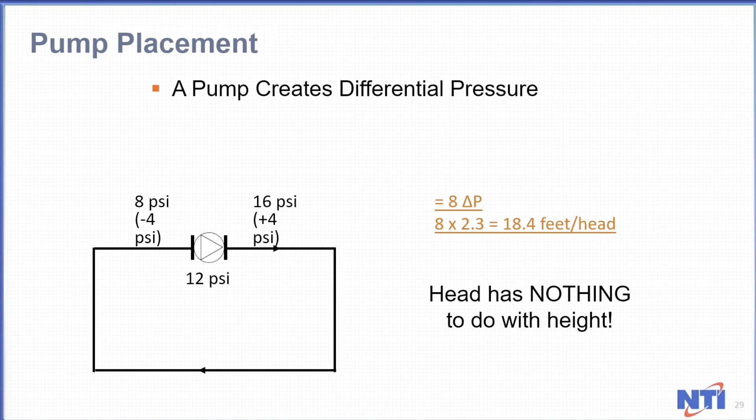But we really need to have an expansion tank somewhere in here to be able to handle it, right? So now we put an expansion tank in, and our expansion tank is your point of no pressure change. If it's set at 12 PSI, that's great. Here the pump's putting out, it goes right to 12 PSI to the tank and drops the entire system to 4 PSI, which is absolutely terrible. Same delta P, but now the system is dropped to a third of its actual pressure that you charged it to.

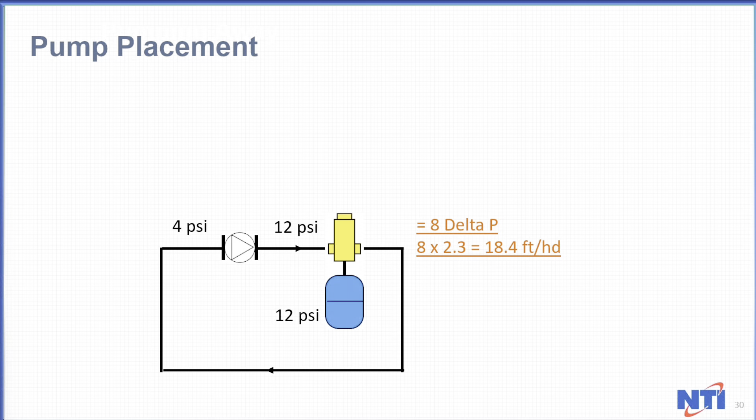Whereas if we just change that expansion tank position, now all of a sudden we have a 20-pound system and a short section of 12 PSI. So this is important for us to put our head around, that everything we do in hydronics is based on delta P, or a change in pressure. High pressure goes to low pressure in all applications.

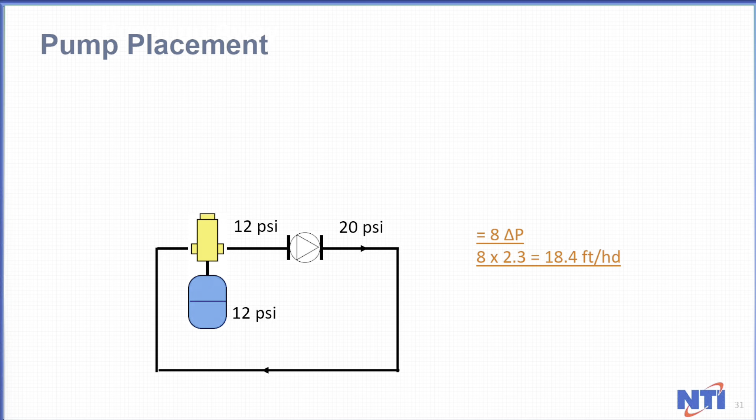So we want to try to make our systems higher pressure to make the air smaller and to increase flow by 30%, but also most importantly, increase transfer of heat by 30%, which is amazing just to think that a small change in not what you put in, but where you put it. So that's important to just keep that in mind for the rest of the night.

So here's the systems the way we used to be, right? I'm going to get my highlighter out here, because I like to use a highlighter. In days when I started in this business many years ago, looking through the list, I was born before a lot of you, but not all of you.

Anyway, so here's a standard boiler. We have a cast iron air scoop. We have an atmospheric ceiling mounted expansion tank. We have our circulators on the returns. We have flow checks on the supplies. And this is how I was taught to put boilers in.

Now, these air scoops, of course, never worked. Just a brief note, because we never read the directions, RTFM first, that said you need 18 inches of clear straight pipe before this air scoop to stop the flow from twisting. Realize that what comes into an elbow comes out of an elbow, so you have two different velocities, or a whole bunch of different velocities, where the water on the inside is going very slow and the water on the outside is trying to keep up, going very fast. So it comes through here twisting like a son of a gun and doesn't smooth out until it gets right up here after 18 inches. Then it can go through and the air can actually get out.

So, you know, we created our own need for a spirovent, folks, or a micro bubble air absorber. But in the meantime, back in those days, we used this to hook up our ceiling expansion tank. So any air in here would go up to the tank and refill the air. And we put our fill in there because we knew this was the point of no pressure change.

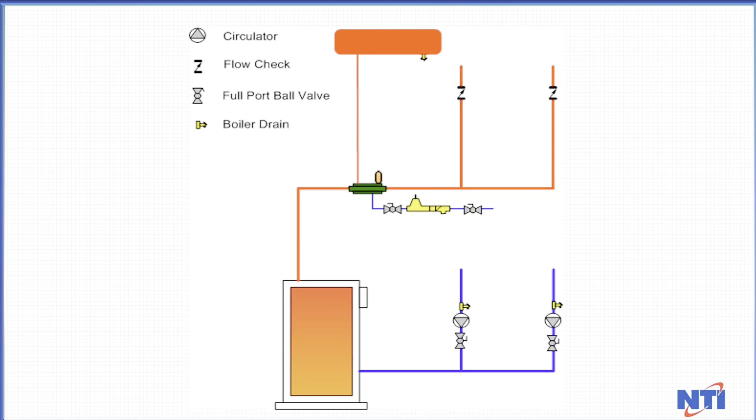Now, we don't want a cast iron boiler to ever condense. It creates bad blood. It creates sections cracking, sections warping, all sorts of havoc. So what we used to do to correct that is put a bypass in.

This was the early days of primary, secondary circulation. If you could see my hands, one circles slow and one circles fast. The slow one is the boiler flow, going much slower than the system flow, because you have two different flows. The flow from the circulator comes up, hits the path of least resistance, and puts 70% of the water around here, letting 30% go through the boiler. That way the boiler can get up to 180 degrees and stop condensing.

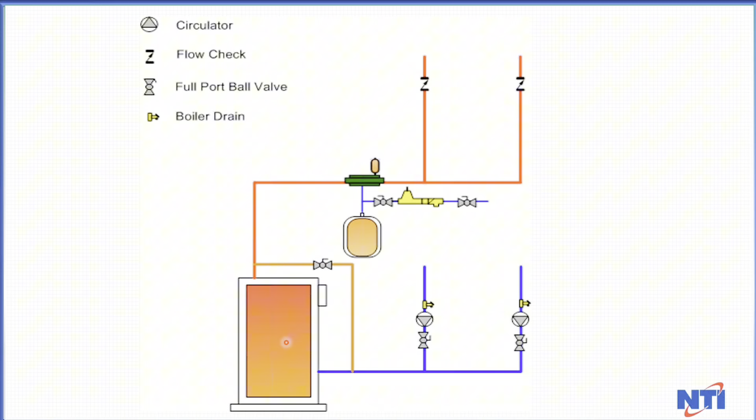And this was the important part of that. Jason, if you would, after that explanation, please launch poll question number 3.

What was the reason for the bypass? Select: 1. Allow the boiler to get to non-condensing mode. 2. Reduce expansion noises in the system. 3. Better combustion. Or 4. All of the above?

Did you pour out that beer you were drinking? I was tapping on my glass to try to simulate expansion noises.

So Jason, what are the answers? Let's see, 59% said... I'm loving this, this is going old school too. 59% said allow the boiler to get to non-condensing mode.

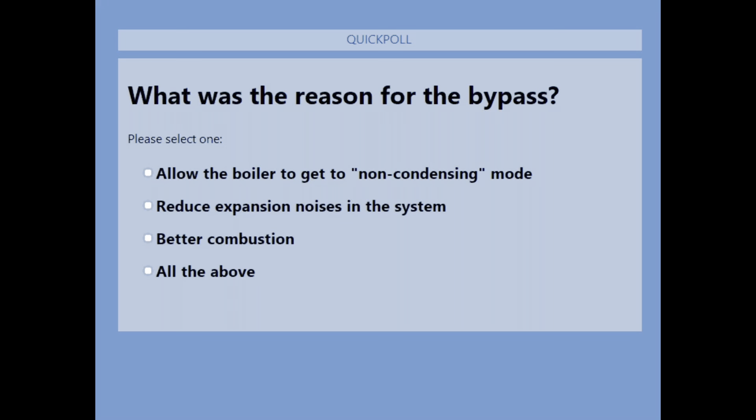Voice came from, where'd that come from? So cool, all right, end it up. It's kind of a tricky one there. I know, I have to be tricky.

So here we are now. We're going to pump away, get rid of the ceiling expansion tank, and put a microbubble air absorber on. We're going to do the system using old school bypass ways to show how we should be piping it in.

Those of you who do commercial work know for a fact you will never see a base mounted pump on the return of a boiler, for God's sake. You always see it off the supply, pumping to the system away from the expansion tank, and you know that. There are multiple reasons why we put them on the return, part of it going back to 1901 when we switched from steam to water, because we were blowing up boilers since people didn't know how to put a fill on a steam boiler. We didn't have seals to handle 212 degrees, because that's what everybody ran their boilers at, since that's what steam was at. It's all fine and good, but the bottom line is the circulators need to be on the supply, so the system is high pressure.

That picture right there, go around that expansion tank and that feed. That's perfect, dude. They sell those in kits.

You can buy them. Okay. Jason, I don't care about the kits right now, I got a lot of stuff to go through.

To cut you short, I understand the kits, but we just need to know where we got to place this right now.

So now we got into a thing called outdoor reset. This is where we lower the temperature of the water, or the amount of thermal energy we're sending out to the house, as the outside temperature goes up. When it's 70 degrees outside, we could send 70-degree water out because there's no heat transfer.

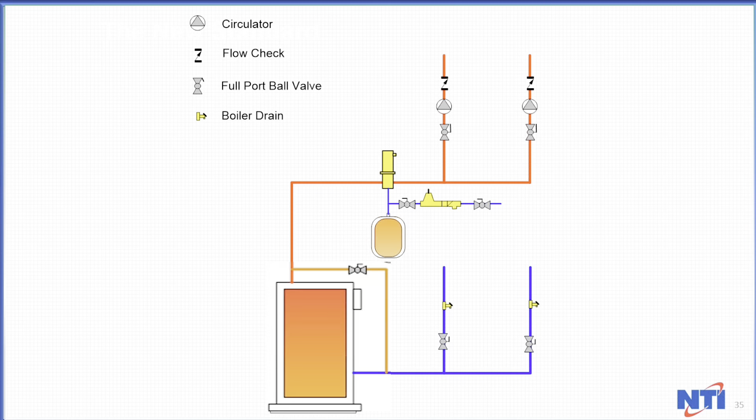It's pretty easy, but with a cast iron boiler, you couldn't do it directly. So what we did back in those days is we created true primary-secondary circulation, where upon any call for heat, the circulator on the primary loop would start to circulate. Round and round it goes.

We'd have a sensor somewhere up here on the supply line that saw how much heat we had, and it would turn the boiler on, let the boiler get to 180 degrees, then start the circulator up and inject that through these two closely spaced T's in the system to bring it up to the temperature we needed, allowing the boiler to be over 160 degrees so we don't condense, because we knew that if we returned below 140 here, the boiler would condense.

So at least 160, it would inject the system temperature, off would go the zones, again on closely spaced T's, which I'll explain in a second. And when we had a call for domestic heat, the circulator on the loop would turn off, the circulator for the indirect would come on and bring the water back around. The boiler would continuously run at 180 degrees and everybody was happy and off we went.

Now, the reason for the two closely spaced T's is, as we discussed, a circulator works by circulating water by creating a delta P, or a difference in pressure. When these T's are 4 pipe diameters apart or closer, that's 4 pipe diameters of the branches, when the water gets to the first T and gets to the second T, it's the same pressure.

If the circulators are not running, it's the same pressure on both T's, so it just keeps on going around and around until we turn the circulator on and create a drop in pressure. Now the water goes up and around and back in, up and around and back in. That's the way a circulator works.

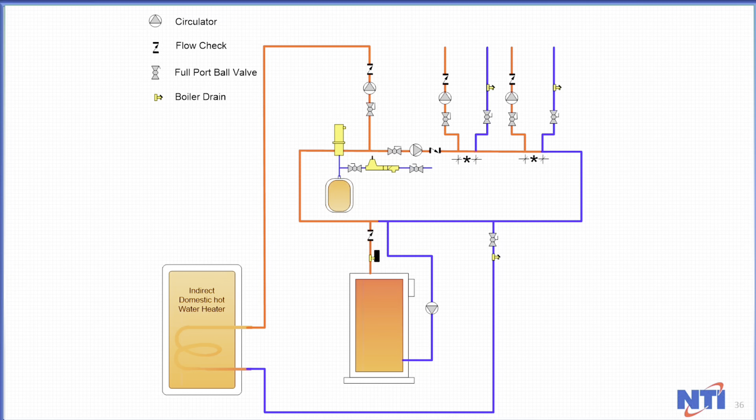But now let's move on here. So now let's make this a little bit bigger. Now we have a bigger boiler, we got all sorts of zones here, we got circulators. Now we're going to reverse our flow here, going around this way instead of my other zone.

Now I have an indirect zone, I have boilers, I have zones set up here on outdoor reset. I got a radiant heat zone, and everything's being protected. The boiler is just having a grand old time, running between 160 and 180, injecting through the circulator, just pumping up depending on the temperature we need.

And everybody was happy. This is primary, secondary as we know it. It's pretty easy, but primary, secondary required you to have a circulator on that circular area, on that racetrack right here. It required you to have this circulator. You had to do it.

So the two closely spaced tees, here's my primary circulator going through the loop. It would get to the first tee and say, oh, no pressure drop, and keep on going around the loop until the circulator came on to go up to the load. So we had our primary circulator and our secondary circulators. Hopefully this is clear as mud to you guys on the phone, because I can't use my hands to show you anything like I normally do, thanks to whatever happened in my GoToWebinar.

But again, we'll figure that out. The key there is 4 pipe diameters, and that's 4 pipe diameters, not of the main pipe, which is handling 100% of the flow, but of the secondary loop going off to the system. So if this was 3/4 inch pipe, these tees should be less than 3/4 of 4, so it'll be 3 inches apart between these two tees, which is dead nuts together on the tees, as you know, especially at ProPress today. So that's where that comes in.

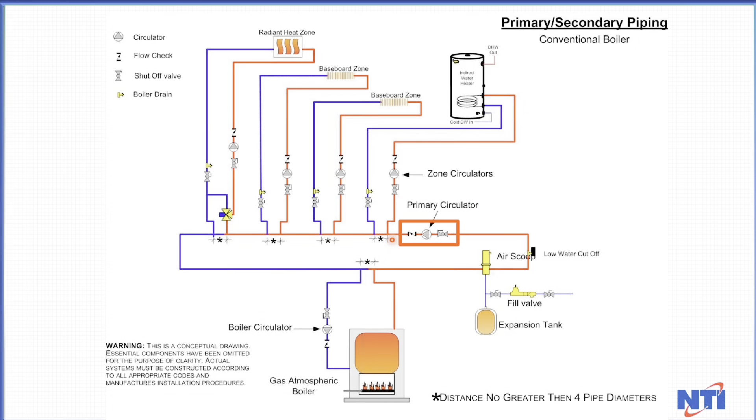So keep that in mind, because if you don't have that 18 inches straight, you have that cavitating flow that will create a pressure drop, and you'll actually get ghost flow. Let me go one back further. You'll actually get ghost flow if there's not 18 inches of straight pipe, and create circulation through this when this circulator is running if you don't have that straight pipe before it.

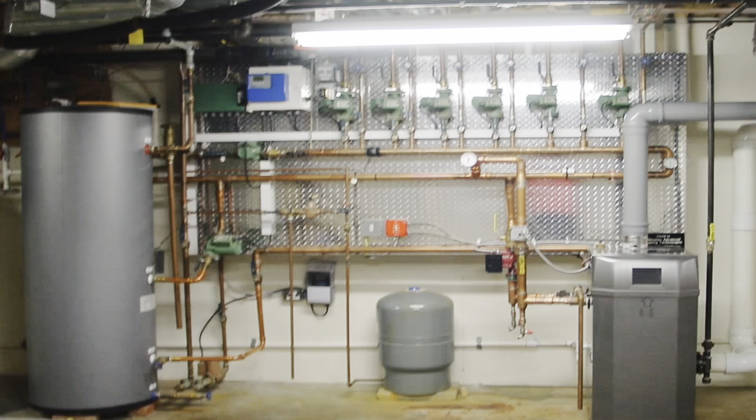Here's primary, secondary, the way we used to do it. Now, this is a condensing boiler now, so we don't need to have a primary loop. But when this system was originally put in, it was twin 200,000 BTU cast iron boilers. And we see the primary pump here that would circulate the water around and around and around. And this pump would go off when the indirect pump came on and would pump through the boiler and back through. We'd only inject the boiler as needed.

But now that it's a condensing boiler, this boiler goes up, outdoor reset. It keeps this loop at an outdoor reset temperature, but we didn't want to get rid of this primary loop. And you can see these loops going out, the zones going out on as close as we get them. Look how close those tees are. I mean, they're soldered right next to each other. Yes, this is before ProPress. And yes, the person who did this loop screwed up, and this loop is back to being the right way. So this is primary, secondary as we knew it in the 80s and 90s before we came out with condensing boilers.

Now, let me show you a couple pictures here. Here's the racetrack that an old friend of mine used to show. He would call this the racetrack, this primary loop, and off we go, woo, right? And here's our two closely spaced tees on boiler 1, two closely spaced tees on boiler 2. Here's a zone over here with two closely spaced tees, a zone up here with two closely spaced tees.

But they broke my primary rule, which is they don't have 18 inches of straight pipe up here in the corner, and they don't have 18 inches of straight pipe here, which means anytime this circulator runs, it's going to create flow in this loop, and it's going to create flow through this boiler, whether it wants it or not. Not a lot of flow, but enough flow that we don't want. These tees should actually be over here, just past to the right-hand side of that yellow square to make it right. And of course, here's your two closely spaced tees coming off of your atmospheric boilers to make it happen. So this was primary, secondary, like I said, of the 80s and 90s. So now this is how we do it with modulating condensing boilers.

We don't care to protect the boiler from condensing, because if we did, we'd just call them modulating boilers. But we call them modulating condensing boilers because we want them to condense.

Here's our circulator that's going to create our differential, so we make sure we have enough flow through the boiler. And here's our zone pumps going around. Of course, they're pumping away from the point of no pressure change, aka the expansion tank, so we have a higher system pressure, and this pump can do its job.

Now, this pump has multiple reasons to be there. One is we've gone from a huge area of heat transfer in cast iron boilers to a small area in the condensing boiler. So we need to move the water at a given rate to make sure we don't boil the water. The other reason is to make sure, especially in a water tube, we have the right amount of flow so we don't scale up.

We try to prevent scale inside the tubes so we have enough flow, and that's where this primary-secondary came in for condensing boilers. Now, people say, 'my primary pump, I don't think it's the right size.' And I say, 'which one's your primary pump?' And they say, 'what do you mean?' I say, 'do you have a primary loop?' 'Well, yeah, that's the boiler.' No, it's not. We no longer have a primary loop.

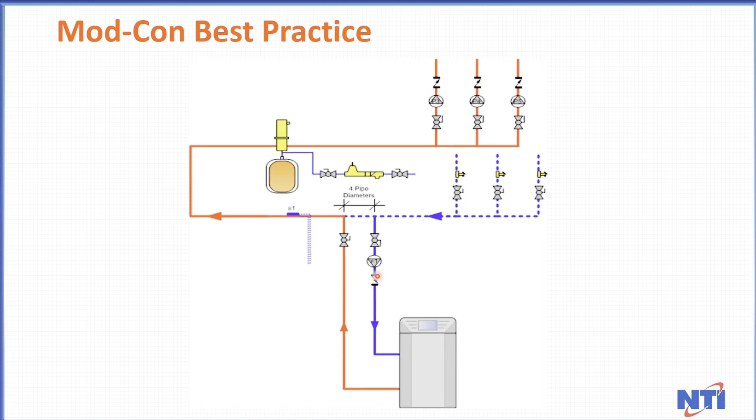So we have boiler pumps and we have system pumps. So when you call up and say, 'Wheels, what size primary pump do I need?' I'll say, 'which one are you calling the primary, the system pump or the boiler pump?' As long as you did it our way, we can go from there.

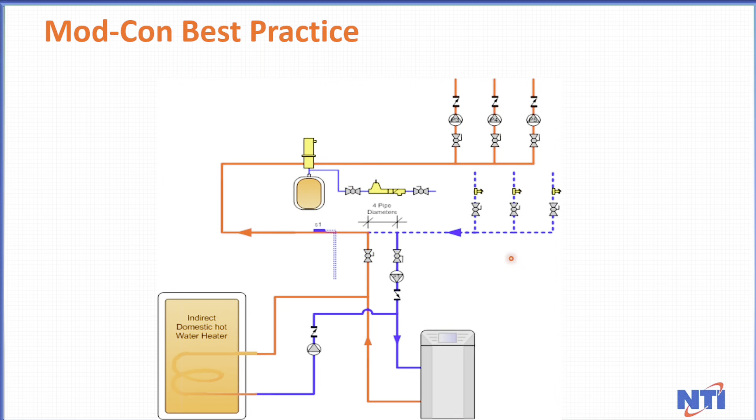Now, when you add an indirect water heater to this, we break it in between the circulator and the modulating condensing boiler, so we can turn the circulator off to the boiler for the system, turn the pump on for the indirect, let the boiler go to 180 degrees, circulate 180-degree water through here. When that's done, this pump goes off, the boiler pump comes back on, circulates water up to the closely spaced tees, and the system can go back to having outdoor reset temperature.

So that's closely spaced tees, much like shown right here. Now, I've drawn it this way for a particular reason, because closely spaced tees are not the only way you can do this, but here we are with closely spaced tees, and here we are with the drawing with closely spaced tees and having the indirect water heater next to it.

You can see I've now included a magnetic dirt separator coming back in. I have the system flow going out. I threw a radiant floor on the end just for the hell of it, so that we can have some fun with this, right? So here's primary-secondary using closely spaced tees.

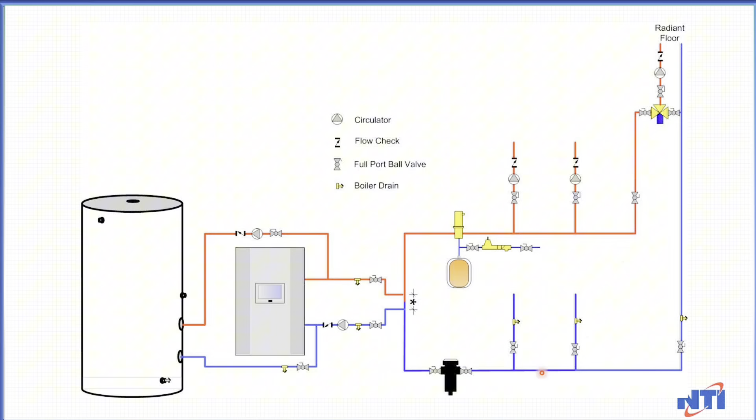Now, the advantage of using closely spaced tees is it's sized based on the highest flow rate between the system or the boilers. That means the size of this pipe going through here is sized based on either the system flow or the boiler flow, whichever one is greater.

The advantages of closely spaced tees are space. They're very small. Adaptability. I can put them anywhere in a system. I just have to tie the supply and returns together, going off on an existing system and throw 2 tees next to each other, and I can plumb my boiler into it. They're not very expensive. I'm saving money.

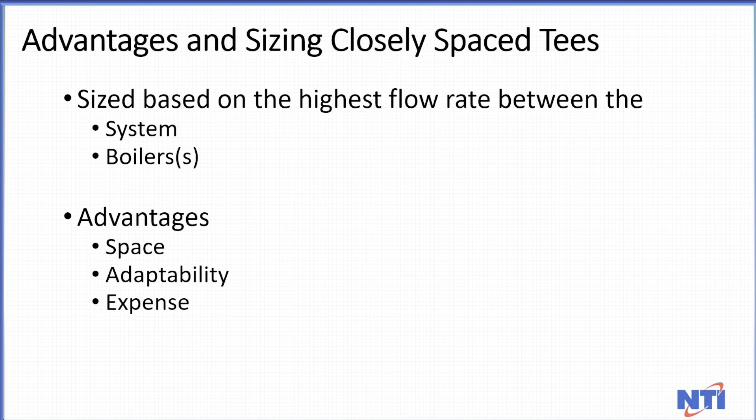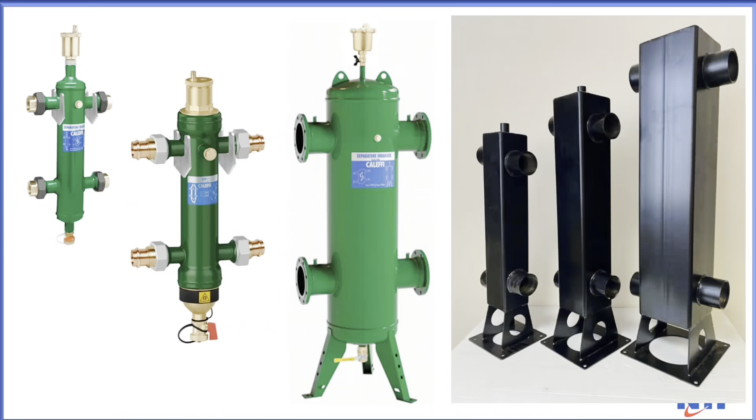So they work. Now, a lot of people are starting to use low loss headers. Low loss headers are these very famous little things that look like—well, why am I even talking about low loss headers and telling you what they look like when I can show you? So here's some of the floor mounted commercial low loss headers that I've seen.

Here's a floor mounted flanged one from Caleffi. Here's a large, I would say large residential, light commercial Caleffi with a magnetic separator, which we call SEP4. So this is going to do multiple things as opposed to this one, which is just a low loss header. This is actually your micro bubble air absorber, your dirt separator, your magnetic filter, and your primary secondary loops.

So our boiler is attached here going around and around and around, and our system is tied here going around and around and around, and it pulls everything through if it has to, and gets rid of your air, gets rid of your magnetite, gets rid of your dirt, and it's a phenomenal unit. So it's four things in one. These are phenomenal little things.

The biggest floor mount system I've ever supplied was an 8-inch flanged unit, huge system. These are sized based on the same principle as closely spaced tees: the flow rate based on the maximum flow of either the primary or secondary circuit, whichever is greatest. Caleffi calls one side the boiler and the other the system, but it doesn't matter which is which, whichever has the greater flow is what you size your GPM to, which is listed right here.

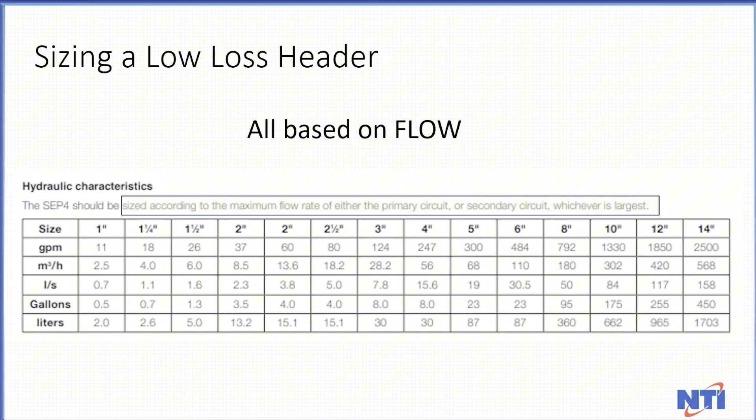Look at that 8 inch one, look how much it does. Oh yeah, that's serious.

The advantages of a low loss header are smoother flow rates. You don't have so much conversion between two closely spaced tees, and you don't have water going backwards on some applications and forward on others, it creates a nice even flow. If you use a SEP4, it can do multiple jobs like air removal, dirt separation, magnetic filtration, as well as separating your system. Sometimes it fits into the scope of piping much easier, and you don't have to worry about 18 inches of straight pipe going into it, because that low loss header is creating the flow it needs.

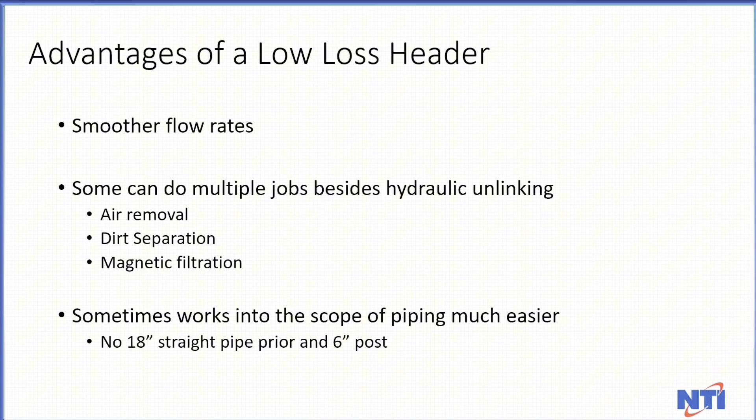On my son's place, I put a SEP4 on so I didn't have to use a low loss header or a magnetic separator, and it works fabulously. You can also get them insulated so that big mass of steel doesn't lose any heat, so it actually works to your advantage all the way across the board.

That separator, I have that SEP4, that thing saves so much time.

It does. So dude, how much do you think the fittings cost? Just off the top of your head, it's got to be a couple hundred dollars at least. A couple tees aren't that expensive.

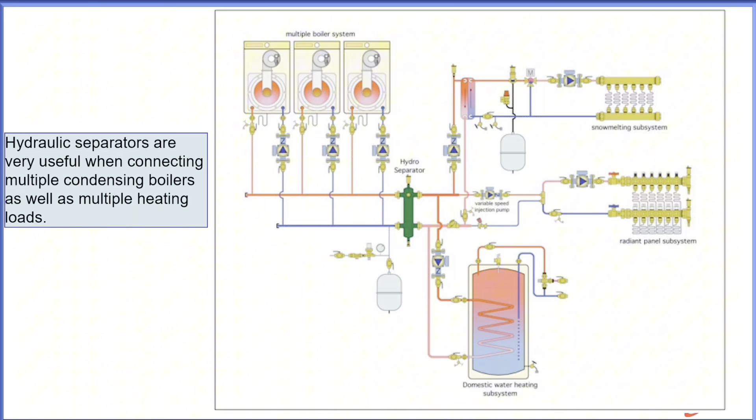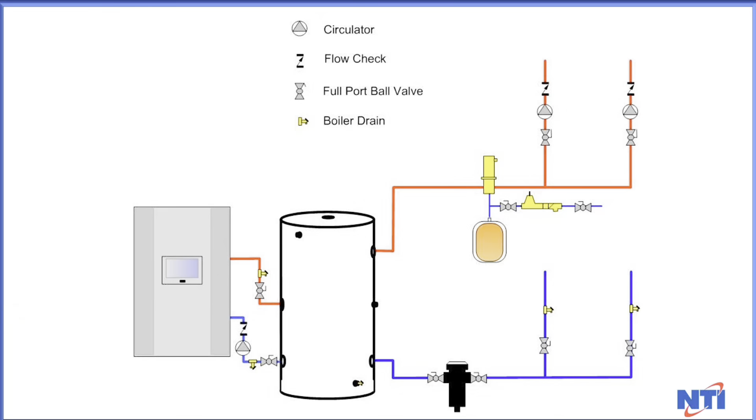The biggest problem I see with these is people oversizing them. By the way, I cheat, and I did draw this in so you guys could see the domestic hot water heater coming in, and I did cheat a little bit by doing it this way.

But I actually designed with a company, and I won't mention their name because you could probably read it. I helped them many years ago in designing buffer tanks, and they said to me, well, we're going to come out with an 80, 100, and 120. I said, no. They said, no, what? I said, you're going to start at 10 gallons. They said, why? I said, because most systems don't need more than a 20 or 30 gallon tank. And in probably 70% of the ones that I do, I can get away with a 10-gallon tank. And they said, how do you know that? I said, well, it's easy.

You just have to put it in the formula, where your volume of your tank equals, on the top line here, the time that you want the boiler to run times the heat source BTU less the load that you have on your smallest zone, divided by 500 times delta T, or your difference in temperature on the boiler that you're going to be turning it on and off at. So you get into these sizings and you go, wow, well, then what do I need?

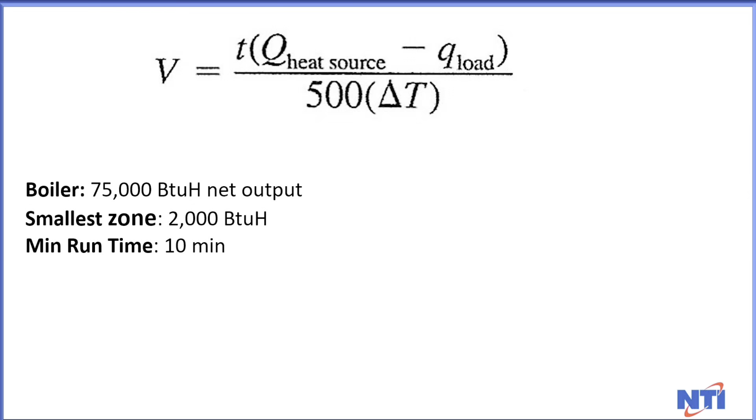So let's take this equation, and let's say we have a 75,000 BTU output boiler. Our smallest zone is 2,000 BTUs. It's a little baseboard zone out in some guy's office, right? And it's just 2,000 BTU, 4 linear feet of baseboard. And we want our minimum runtime 10 minutes, because the boiler you're putting in wasn't built like NTI and made to short cycle. It was something that you need runtime on. And we're going to turn the boiler on at 120, but we're going to turn it off when it hits 180. These are just arbitrary numbers I put out there.

So we fill in for V: we take our 10, which is our number of minutes. 75,000 is the BTU of the boiler. 2,000 BTU is the smallest zone. So 75,000 less 2,000, that'd be 73,000, times 10, and divide that by 500 times 180 minus 120, or 500 times 60. When you multiply that all out, you find out you need a 24-gallon tank, which in the Vaughn world would be a 30-gallon tank, because they make a 10, 20, and 30. But I figure these jobs all the time and I need an 8-gallon or a 15-gallon. Rarely do I need an 80-gallon tank.

And I know that some people believe that having an indirect that's exactly opposite of our indirects, where the tank holds the boiler water and the system water, the domestic hot water, goes through coils, is going to save money because you're going to heat up this 80 gallons worth of tank so you have domestic water. The problem is I can no longer use it for outdoor reset, because they might want hot water at some time, which means I have to maintain a temperature on that tank that's going to give them the GPM that they want. And this is a very hard thing to do.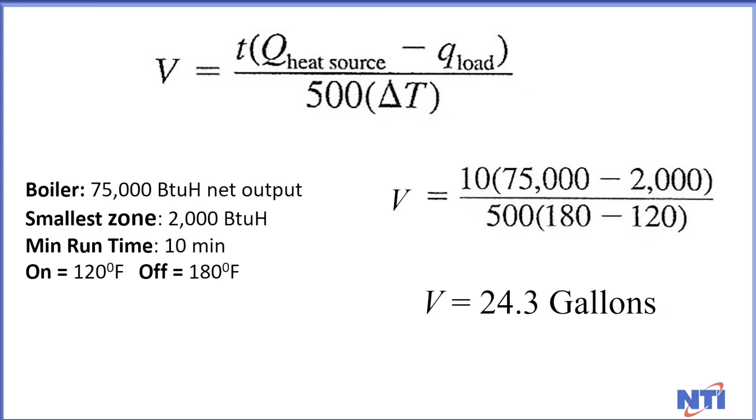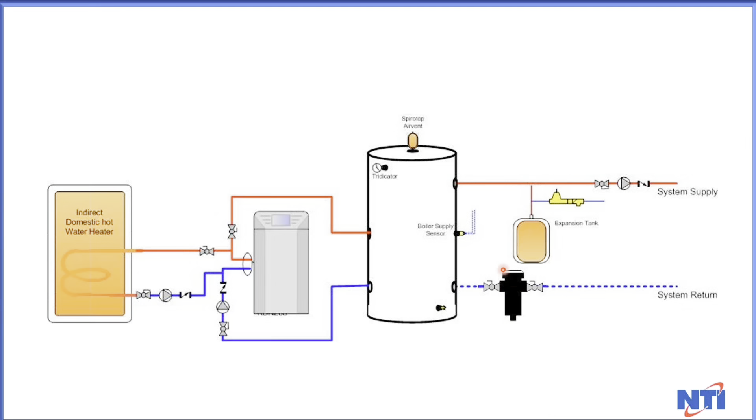Tanks have a great usage in certain applications, especially, in my opinion, cast iron boilers that are probably 3 to 4 times the size they need to be, and can't short cycle, shouldn't short cycle, and you beat the crap out of them, when we could just put in a tank to store that energy, and then you wouldn't have that issue. So use the formula.

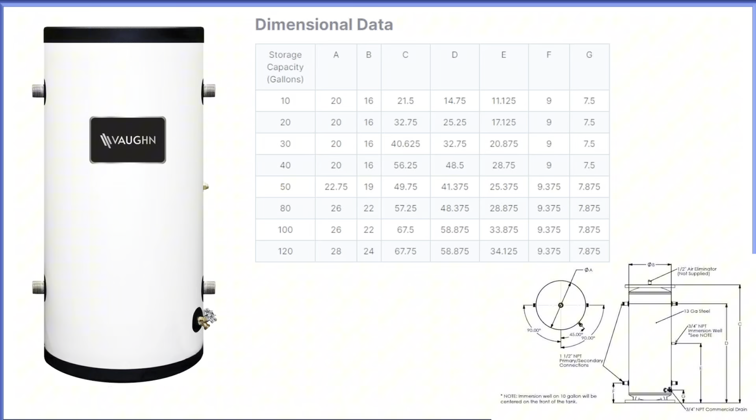If you don't have it, you can take a picture of that real quick and it will give it to you. Once you use this formula once, it's cool. I have in the past built a spreadsheet that does this for me. I couldn't find it today, or that would also be in your resources. Seems to be the camera god and the resource god was fighting me for 8 hours today, so I apologize.

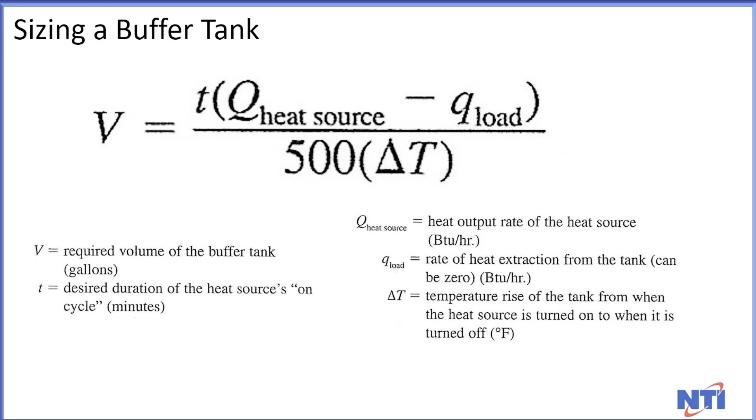Let me give you some resources. Dan Holohan, author, retired. Dan's a good friend of mine. If you haven't bought and read Pumping Away, it changed my world in hydronics. Yeah, it did. It's a cheap book, under 30 bucks. It's available at, I'll give you that resource in a minute.

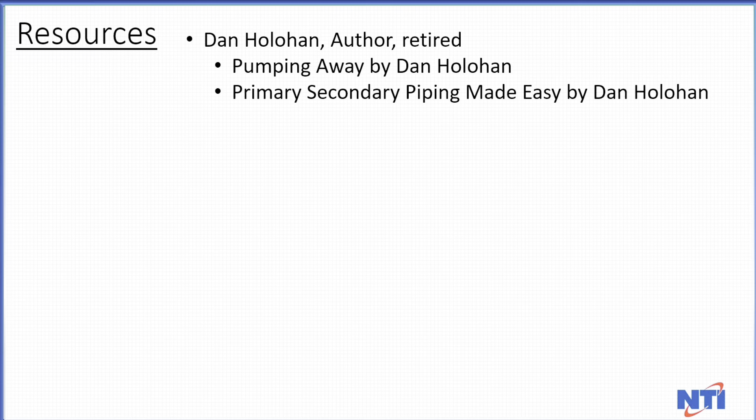His other book that's a fun read, Primary Secondary Piping Made Easy by Dan Holohan. And all of these are available at www.heatinghelp.com, or of course on your favorite Deliver It Tomorrow company, Amazon. Deliver It Tomorrow company, it's funny.

Some of my resources, instead of drawing out and having to figure out how to write a formula in PowerPoint, I copied directly from one of my most favorite teaching books that I've used in multiple tech school classes, Modern Hydronic Heating by John Siegenthaler. He now has Modern Hydronic Heating and Air Conditioning. No need for me to have the air conditioning, although now that we're getting into air to water heat pumps, I guess I do need it a little bit. But my Modern Hydronics by John Siegenthaler, what a great resource it is. That's a good read. If you don't own it, get it.

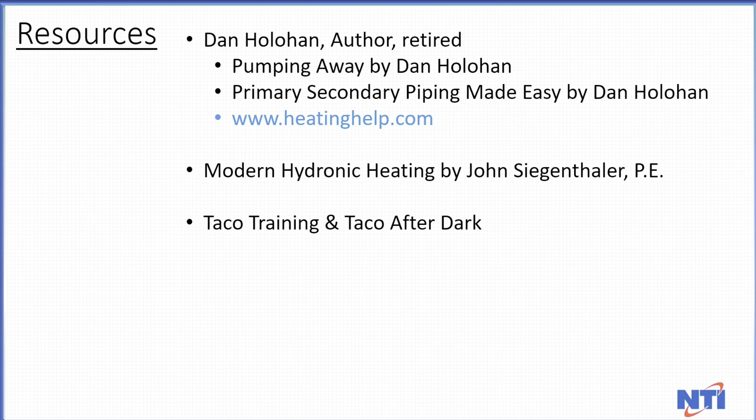Taco Training and Taco After Dark. My good friends, Johnny Barba and Dave Holdorf run the training. Timmy's there with them for Taco After Dark. If you haven't done their class, I think it's 5 Wednesday nights in a row, and you learn everything that Jimmy DePalma can teach you here in the East Coast, and more, on steroids. And if you ever have the opportunity to go to the Taco factory training at Taco, just get up and do it. Don't even ask questions, just go do it. It's worth it.

Last thing, Caleffi Hydronic Solutions. My good friend, the Rohrs, work there. Hot Rod and his son work there. They do a fabulous job at training. They run a phenomenal show. You have Coffee with Caleffi. And then the other great resource, if you haven't subscribed to it, is Idronics Magazine. You can get it electronically or in paper print. There's obviously Caleffi ads in it because they print it, but it's all hydronics, much like our Thursdays, not specific to any one boiler or one type of boiler, but a phenomenal magazine, and they're located at www.caleffi.com.

So Steve, you mind if I jump in here? I want to throw one name out, I don't know if I heard it.

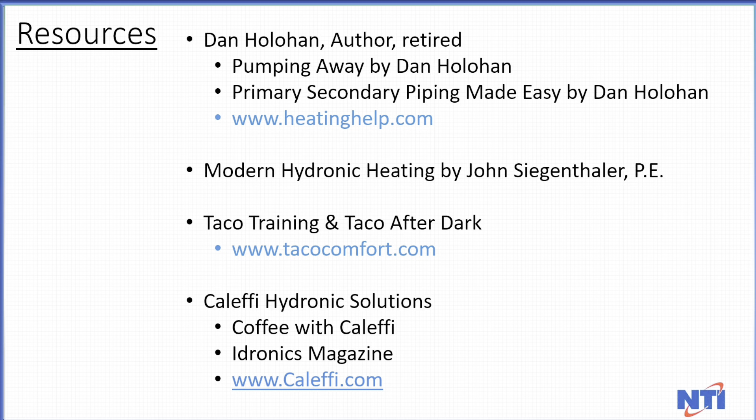Cody Mack, good guy at Caleffi, he's done a lot. Cody's a good boy. So Jason, if you would, release the last poll question.

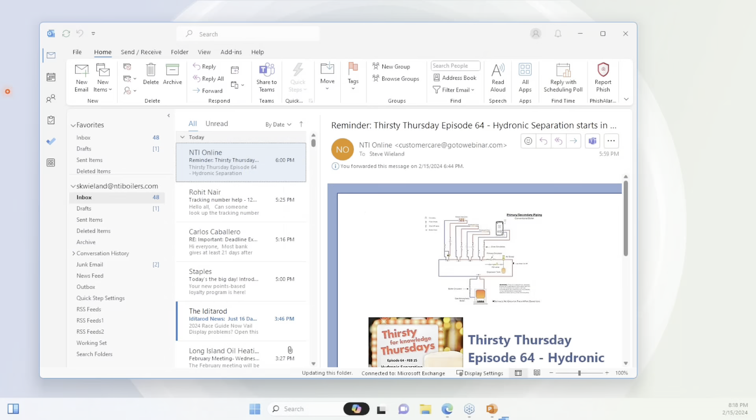Did you find that H picture yet? Yeah, I'm sending it to you right now. Why don't you put it up on the screen? You want to share your screen? No, I've got to send it to your email. Oh, then I've got to open up my email, don't I? Wait, hold on, it's on the way, so you should be good. Well, I don't understand the camera deal. It's so weird, I'll figure it out this week. Oh, never seen it before.

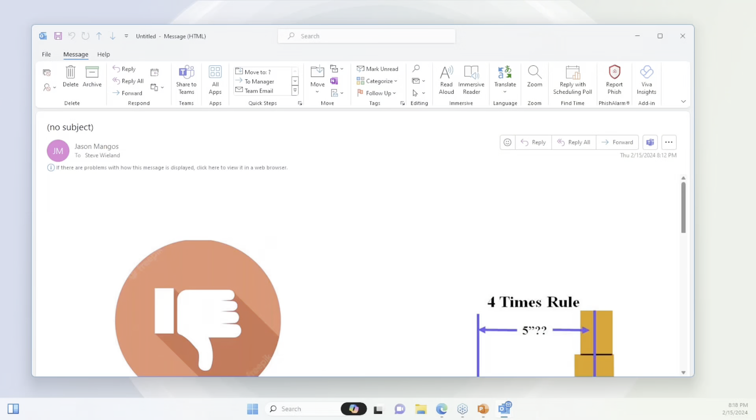It said it's coming from Vermont. So just pull that up there. Yeah, the old H, the old H. There you go. Well, that's kind of an H. That's a T and an H, but a true H would have the T vertically here, which is even worse than what we have.

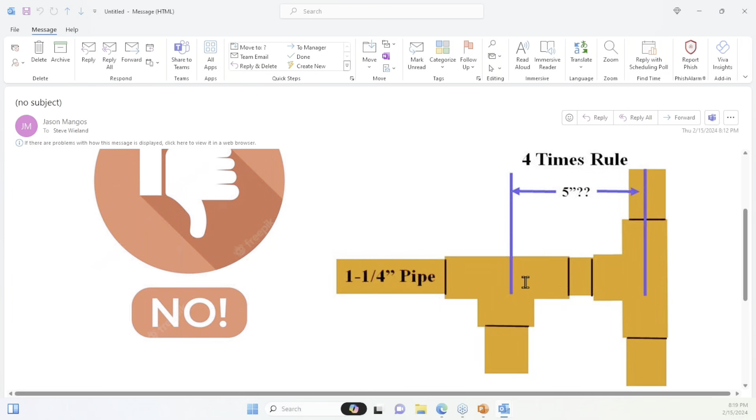I was always taught you can never do this. A true H is coming up through here with the T's in between, so your flow's all trying to get through this cramped little shithole. You just can't do it. People do it to save space, but at the end of the day, you come off the bottom of the boiler with 2 drop pieces, at least 10 to 12 inches, put your T's, a crossover piece, put a valve in there. If you have an indirect, you're all good. I don't understand.

Somebody made a statement that you can downsize your boiler if you have a buffer tank, and that's a fine edge, boys and girls. Be careful. You can store BTUs in a buffer tank, and you're going to learn buffer tanks when we go air to water heat pump, because you're going to need to store the BTUs in an insulated storage tank. So a buffer tank is going to be part of your world - if you don't think so, get used to it, because it's no longer a buffer tank, now it's a thermal storage tank. But if you have a catastrophic failure, meaning you're out of heat for 3-4 days, and you have to try to heat that tank and heat the house, it's never going to happen. Most people don't size their boilers correctly anyway, so yeah, you just can't do it.

Thank you, like, Billy Silk. I love you, you're right.

But anyway, cool, what other questions we got out there? I'm trying to scroll down here and see what we got.